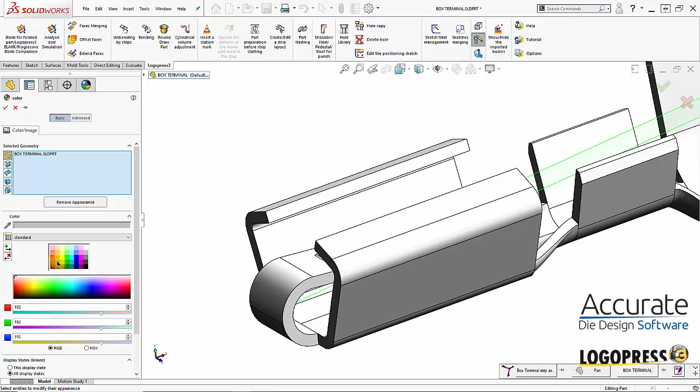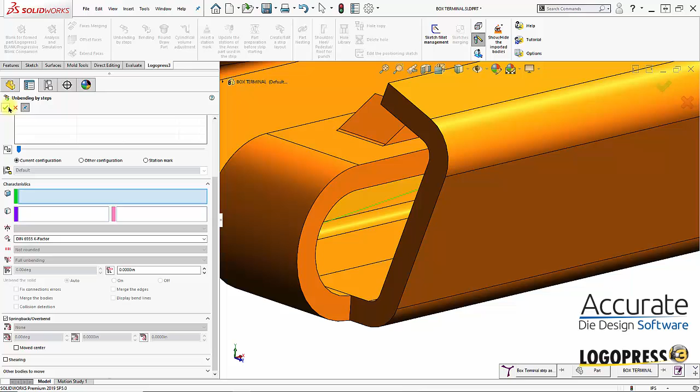Now this center leg has overbend on it. I need to relax that. Select the relax spring back option. Click OK. And when it did that, it merged that face.

The split line's no longer there, so I need to recreate that using the SOLIDWORKS split line.

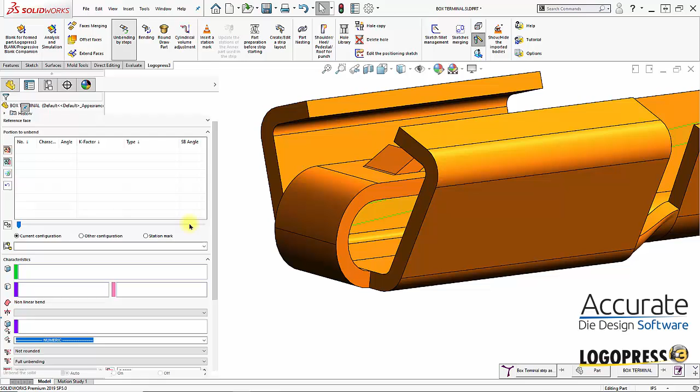Then I can go into unbending by steps. I'm going to partially unbend this leg because we're doing this in stages. I'm going to use a fixed center partial unbending this time of 45 degrees.

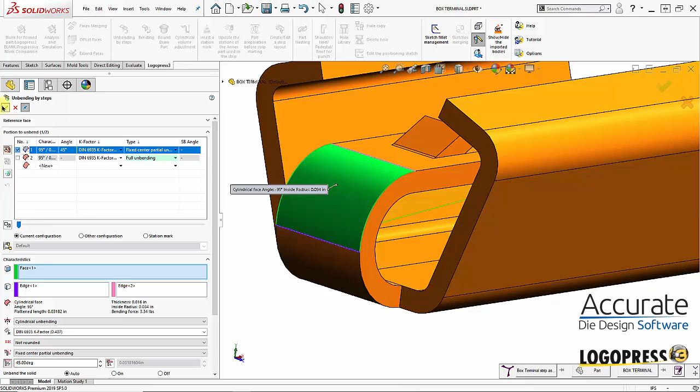There we go, and we'll insert a station mark. This will be called 040, inside leg relax to 45 degrees.

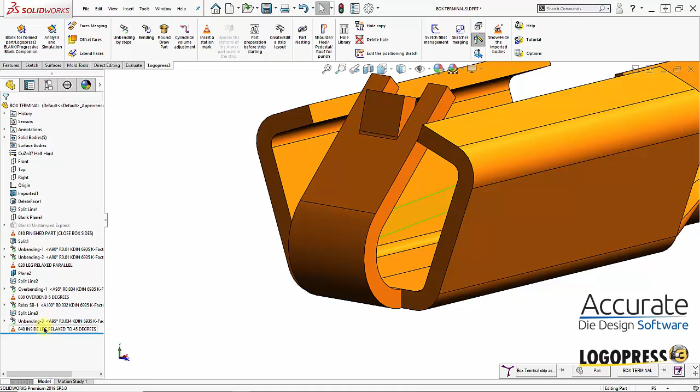We're going to be creating individual station marks for when the leg is relaxed and also in the form station where it has the overbend. That way, if we do want to put idle stations in there, we can have a station where in the form station it has the overbend, and then a station where the leg is relaxed.

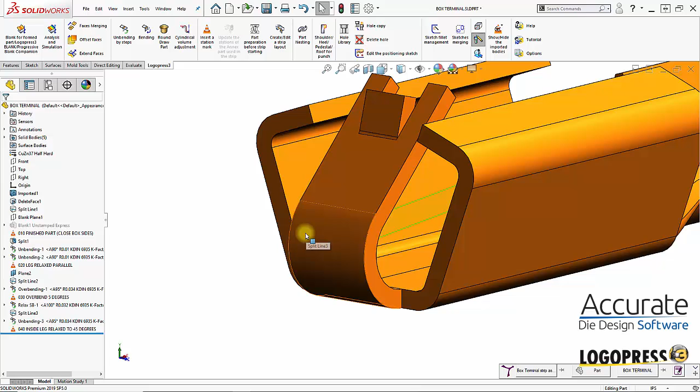After this, I need to create a station, the actual form station where this has the overbend on it. So again, I need to split this face.

Then I can go in unbending by steps and apply the 5 degrees of overbend. Again, the inside radius size is going to be recalculated to a smaller size, so that it'll be bent with the smaller radius on it, but when it relaxes, it'll open up to the radius size that we want. There it has the 5 degrees of overbend.

And then we'll insert a station mark, and this one will be 050, overbend to 40 degrees.

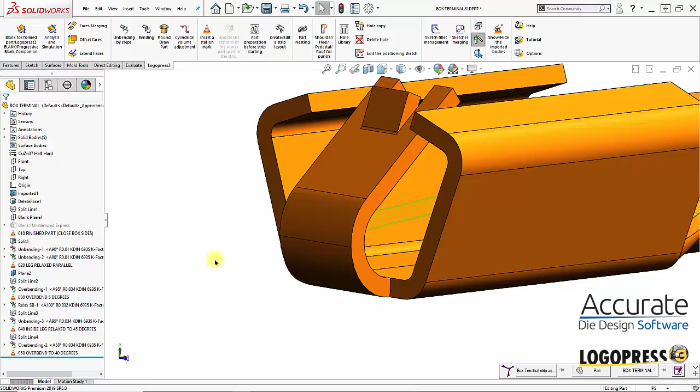And then after that, we need to unbend this. And then we can insert another station mark. This is 060, relax to 95 degrees.

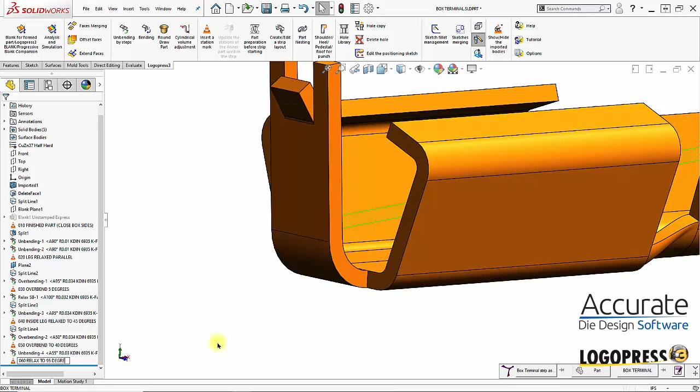And for the station before this, it actually has the overbend on it, so I need to apply 5 degrees of overbend to this.

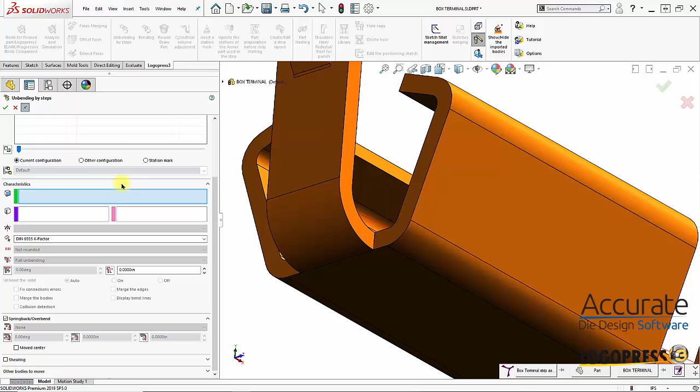There we go, now it's going straight up 90 with the overbend smaller radius on it. Insert another station mark, and this will be 070, bend up 90 degrees.

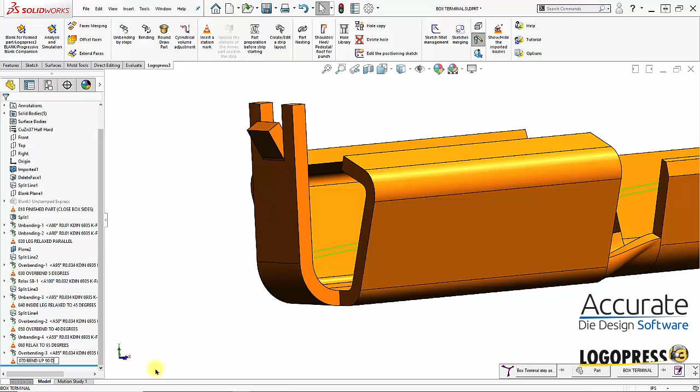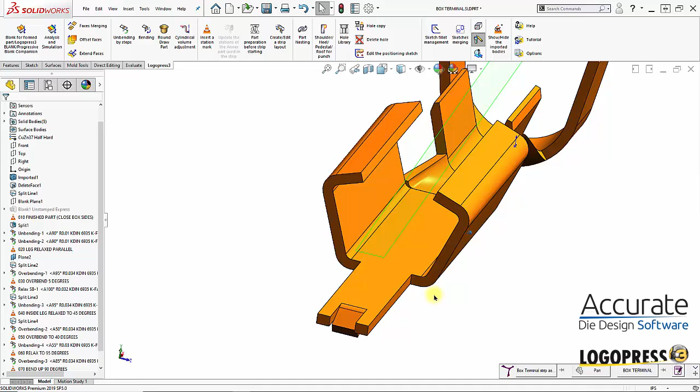And so now we need to unbend it. This is going to be the station where we're bending these outside legs up 70 degrees. So we'll insert a station mark, and this will be 080, form up box sides 70 degrees.

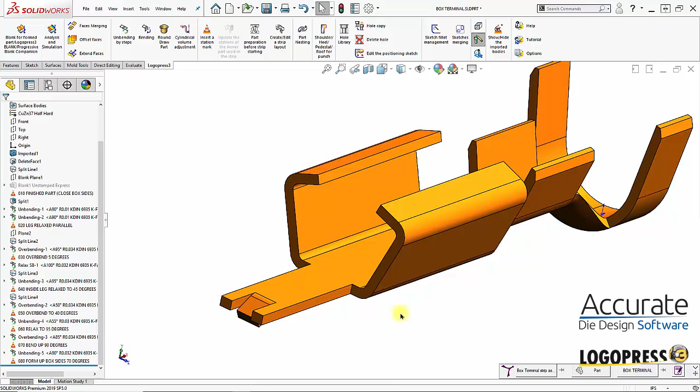Okay, I'm going to hide that plane. We don't need that anymore.

For the station before this, we need to unbend these two legs. So I'm going unbending by steps, unbend that, and unbend that.

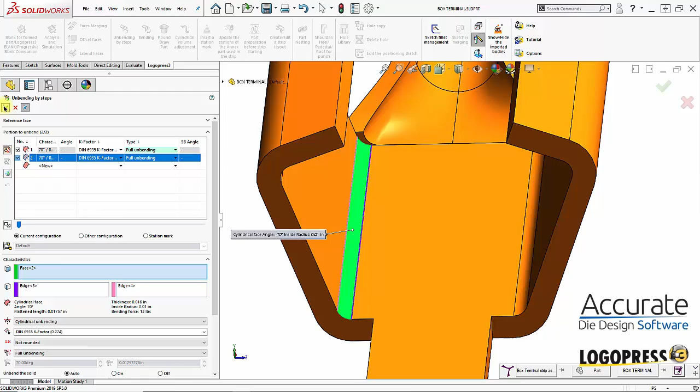This will be the station, I'll insert a station mark for this. Actually, I don't need to do that yet, delete that, because I just noticed this will be where we bend these outside legs up here, the short legs.

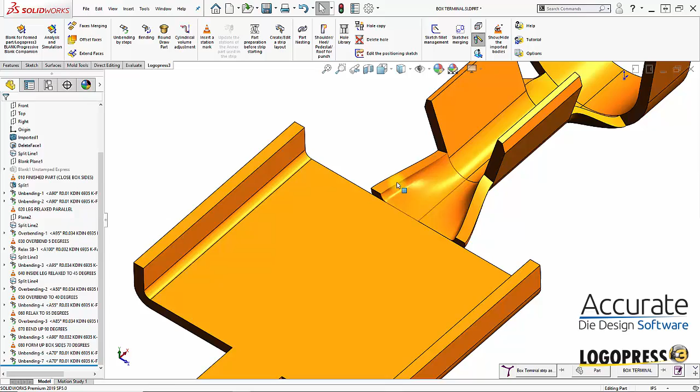But look at that loft, we need to recreate that loft so it comes out to this flat.

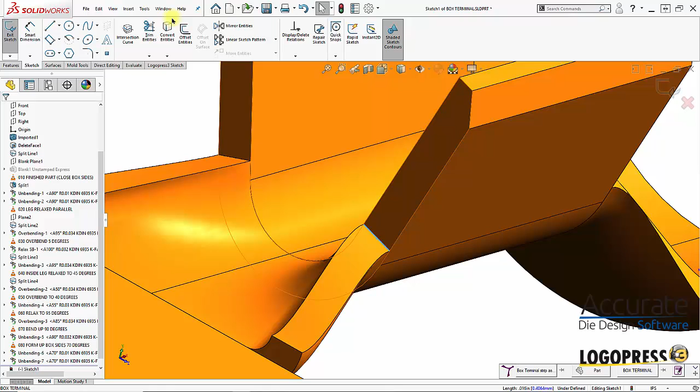So first thing I'm going to do is on this side, I'm going to create a sketch to show where this edge is. So I'll select that and convert it. And just so that I don't run into any reference issues on this right here,

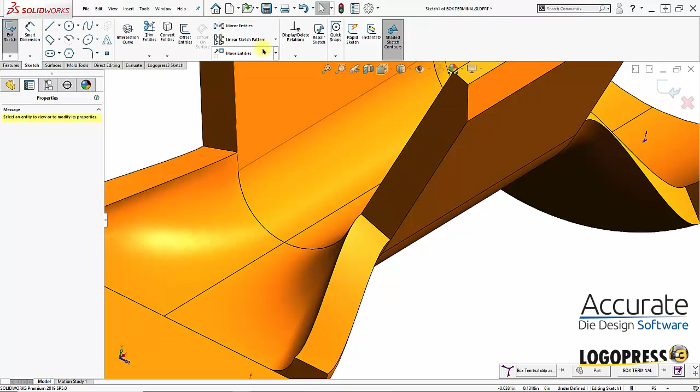I'm going to delete that relation and fix it in place. Then exit the sketch, and I'm going to take and delete this body.

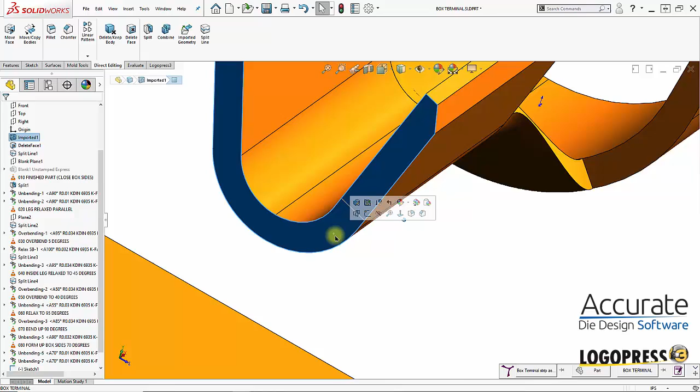And over on this side, I'm going to edit this sketch right here that I created. First thing I'm going to do is drag that up there, or drag this down below. Edit that sketch.

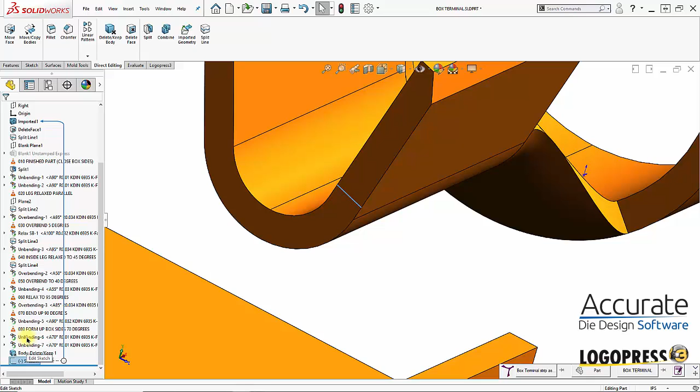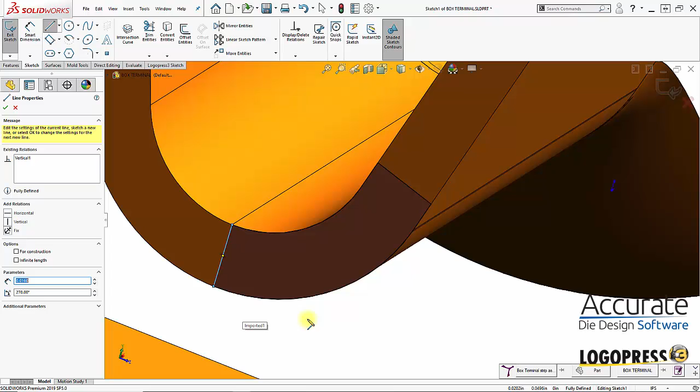And I need to convert some additional geometry because this will be the profile of a loft that I'll be creating. Then draw a line from endpoint to endpoint here. So there's one profile.

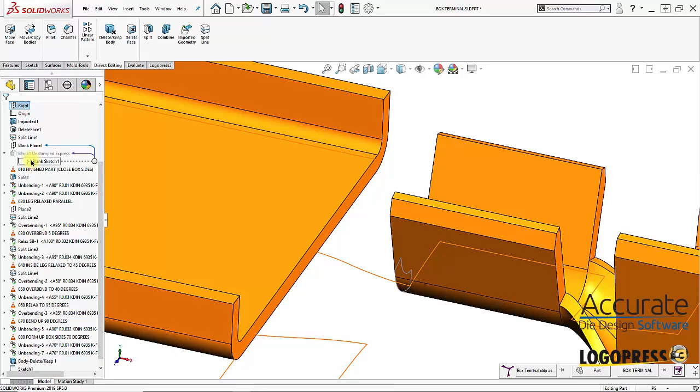And I need to create one over here on this side, but first I need to know where that line is going to end up over here, and we will use that blank sketch that we created when we first unflattened the part. So I'm going to show that, and I'll measure from here to here, and that's 155.155. Exit out, I can hide that sketch again.

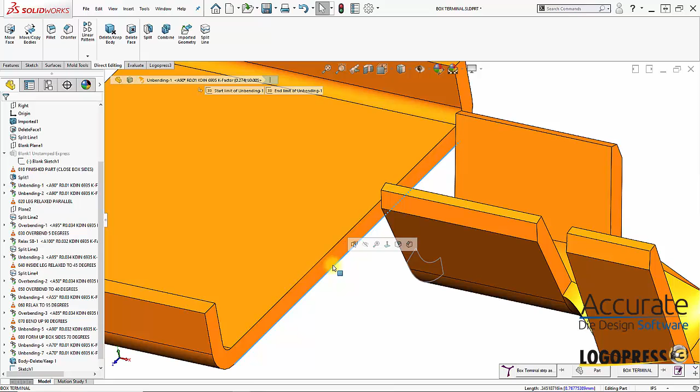So now I can create a sketch on this side face. And I'm just going to convert these two edges, draw a line up from the origin and trim.

And then I can offset this, and I'll just type in, I want 155 divided by 2, and reverse the direction. And then trim those edges.

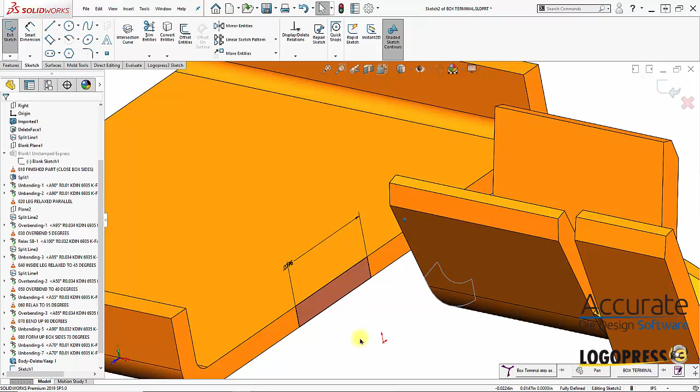Exit the sketch, so I got my two profile sketches. Now I can create my loft.

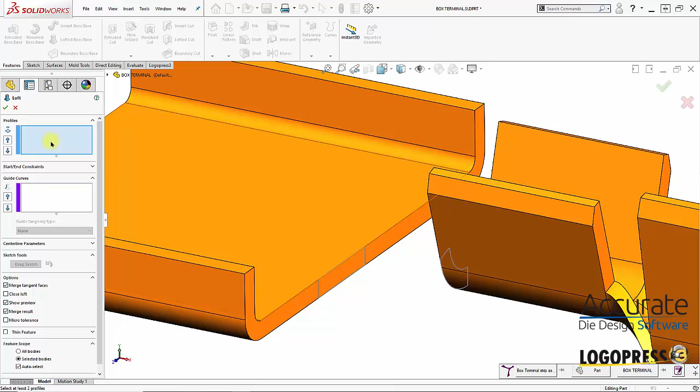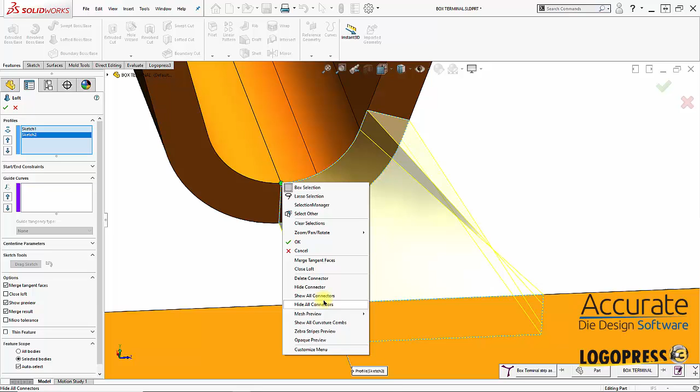So I'll create a profile here to here. And you can see here that this entity is kind of crossing over down to here. If I right click and show my connectors for the loft, you can see how that is coming down like that. Technically I could drag that,

drag that line there somewhere over to here, same thing with this line, it should go over to here and so on. I could drag my lines around, but I don't know where they should be here because this is 6 entities up here and 4 entities down here.

So I'm going to cancel out of that and edit this sketch. Well, first I'll select this. Okay, that's 8 thousandths, that length of that line.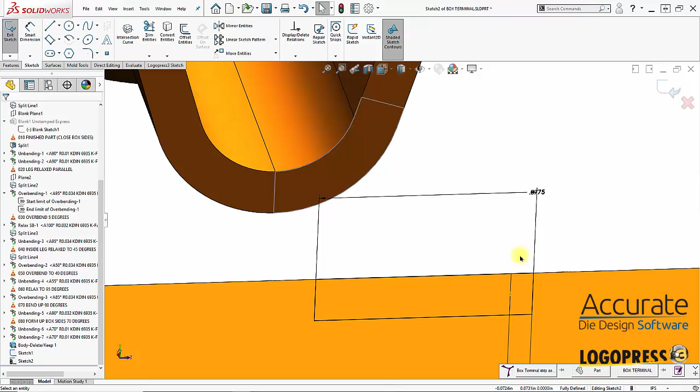So now I will take and edit this sketch, and I'm going to take and offset that entity 8 thousandths. I'll make that for construction, and then what I'm going to do is I will trim this and draw in some extra sketch entities, some extra lines.

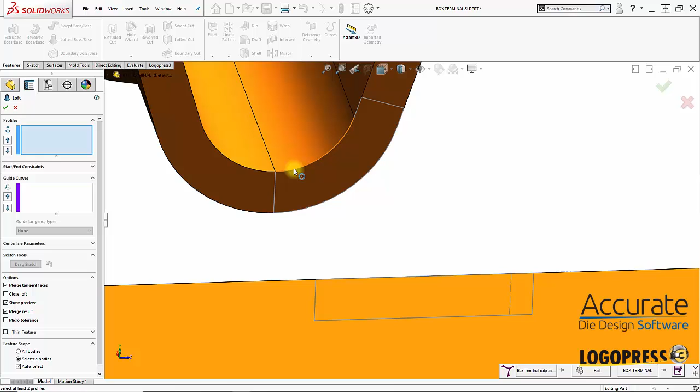Exit sketch, and now when I create my loft, select here and here, and now when I look at the connectors, you can see now the connectors are lining up correctly because we have the same amount of sketch entities in each of the profiles.

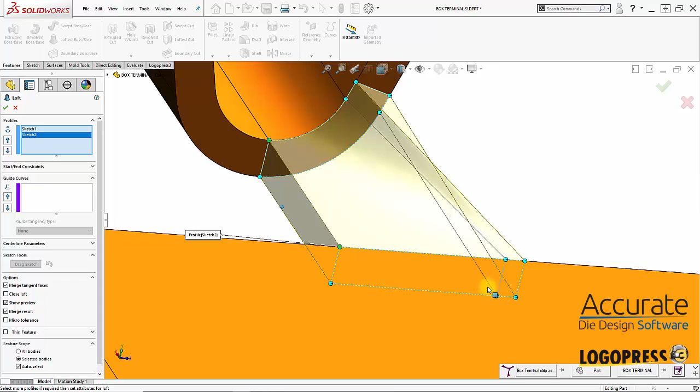Some additional functions or options I should select is you can see that this is not tangent, it's just coming up sharp like that. I can change that over here and say the start and end constraints are going to be normal to profile.

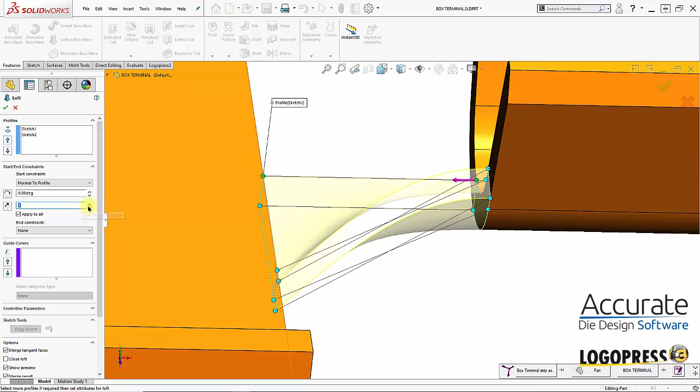So now you can see how that comes in tangent like this. And then one more thing is I'm going to uncheck merge result. We don't want to merge that yet. So click OK.

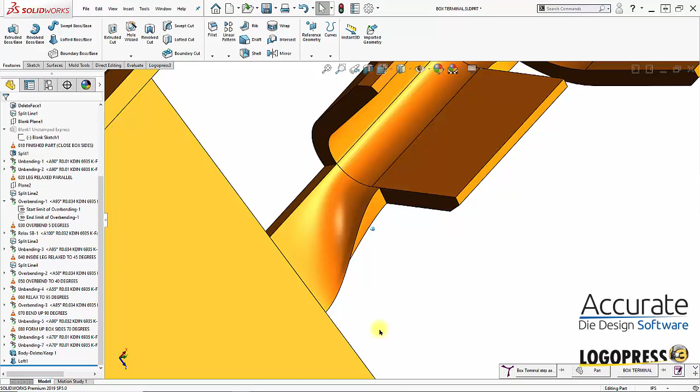And now we just need to mirror that over. So I'll just go mirror and mirror it about there. And the feature to, I want to mirror a body. So mirror that body, there we go.

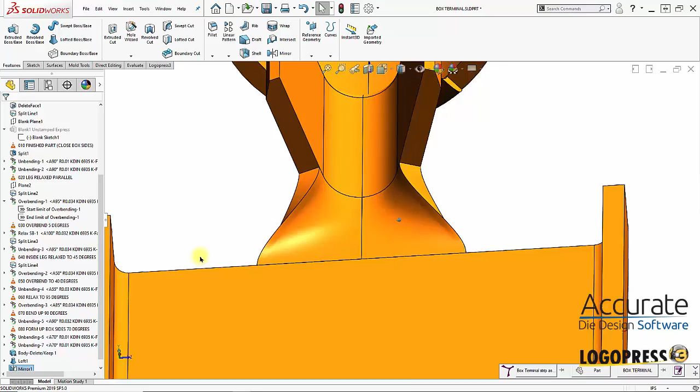And then we have our lofted shape. And I can insert another station mark, and this one would be 090. This is where we're going to bend up the short sides of box.

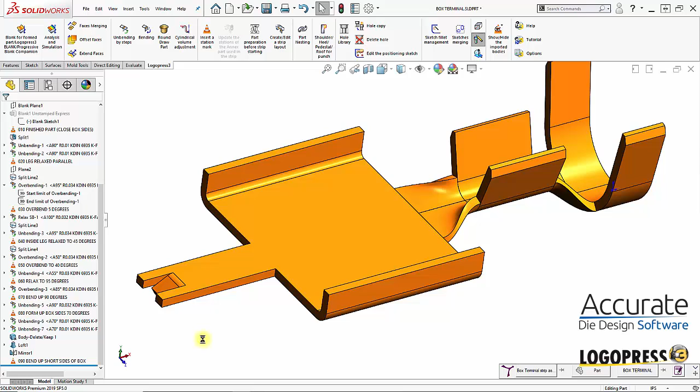And I'll select save, and that'll be the end of our second video.